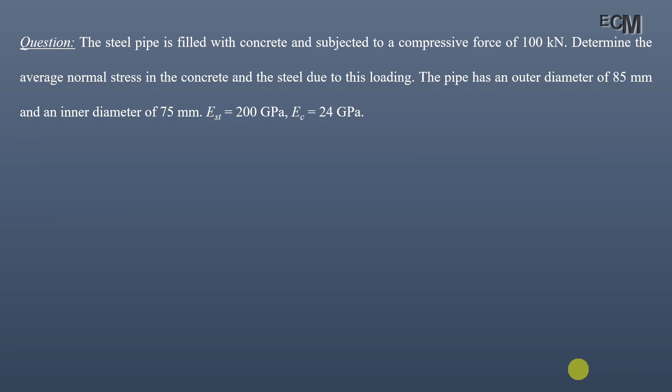The question states that a steel pipe is filled with concrete and is subjected to a compressive force of 100 kilonewton. We have to determine the average normal stress in the concrete and the steel due to this loading. The pipe has an outer diameter of 85 mm and an inner diameter of 75 mm. Modulus of elasticity of steel is 200 gigapascal and for concrete it's 24 gigapascal. The pipe, filled with concrete, has a length of 1000 mm, and a loading of 100 kilonewton is applied. We have to find the axial stress in the steel and concrete respectively.

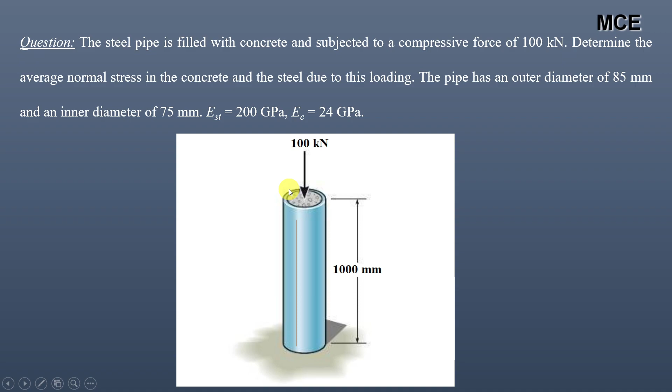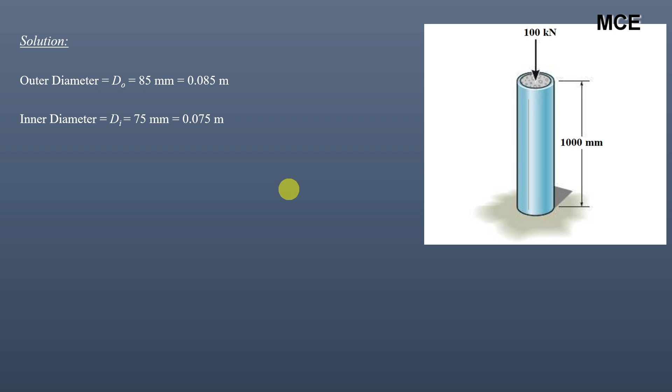Outer diameter for this pipe is 85 mm or 0.085 meter, and inner diameter is 75 mm or 0.075 meter. Cross sectional area of the steel will be pi into square of outer diameter minus square of inner diameter, divided by 4, which is pi into 0.085 squared minus 0.075 squared divided by 4, equal to 1.257 into 10 raised to the power minus 3 meter square.

Cross sectional area of concrete: since concrete fills the inner portion of the pipe, its diameter equals the inner diameter of the pipe. So cross sectional area of concrete is pi into 0.075 squared divided by 4, which is 4.42 into 10 raised to the power minus 3 meter square.

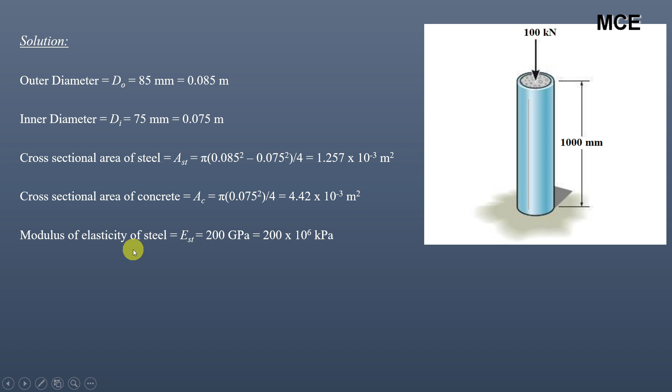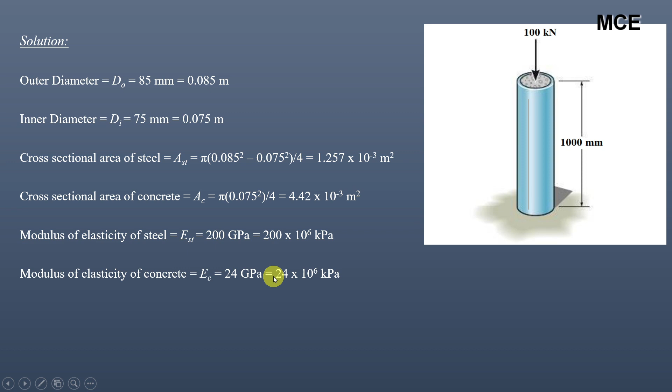Modulus of elasticity of steel is 200 gigapascal or 200 into 10 raised to the power 6 kilopascal. Modulus of elasticity of concrete is 24 gigapascal or 24 into 10 raised to the power 6 kilopascal.

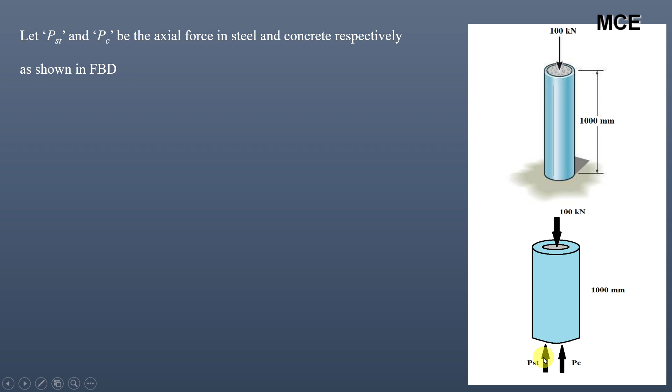After that, we draw the free body diagram for this pipe. Let us assume that PST and PC are the axial forces in steel and concrete respectively, as shown in the FBD, with both forces assumed in the upward direction. For equilibrium of forces, taking upward as positive and downward as negative, we can write PST plus PC minus 100 kilonewton equals 0, or PST plus PC equals 100 kilonewton. Let this be equation first.

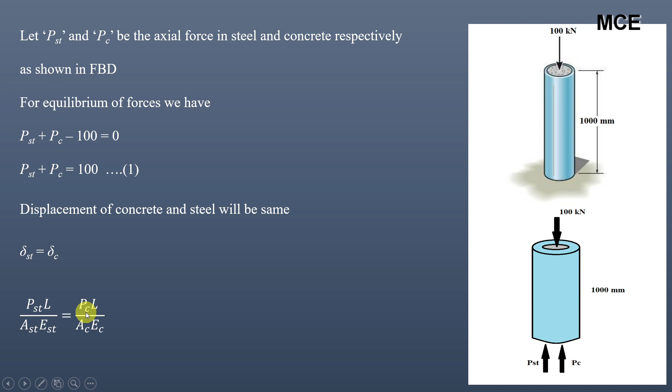From the compatibility condition, since this pipe is fixed at the bottom, the displacement of concrete and steel will be the same. So displacement of steel equals displacement of concrete. Displacement of steel is PST into L divided by AST into EST, and displacement of concrete is PC into L divided by AC into EC.

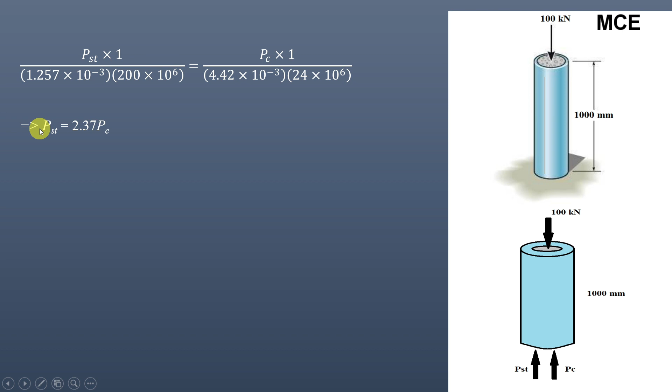Putting in values: since the length of this bar is 1000 mm or 1 meter, L is the same for steel and concrete. Cross sectional area of steel is 1.257 into 10 raised to the power minus 3, and Young's modulus of steel is 200 into 10 raised to the power 6 kilopascal. Cross sectional area of concrete is 4.42 into 10 raised to the power minus 3, and Young's modulus is 24 into 10 raised to the power 6 kilopascal. This gives the value of PST as 2.37 times PC.

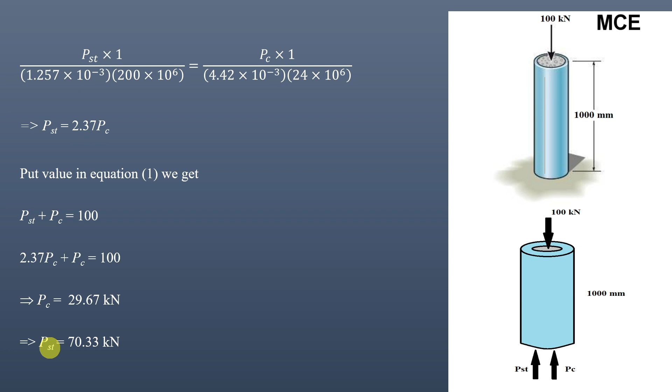Now putting this value in equation first, which was axial force in steel plus axial force in concrete equals 100 kilonewton. Writing axial force in steel as 2.37 times axial force in concrete, plus PC, equals 100, we get the axial force in concrete as 29.67 kilonewton. Putting this value back into equation first, we get PST equal to 70.33 kilonewton. So axial force in concrete is 29.67 kilonewton and axial force in steel is 70.33 kilonewton.

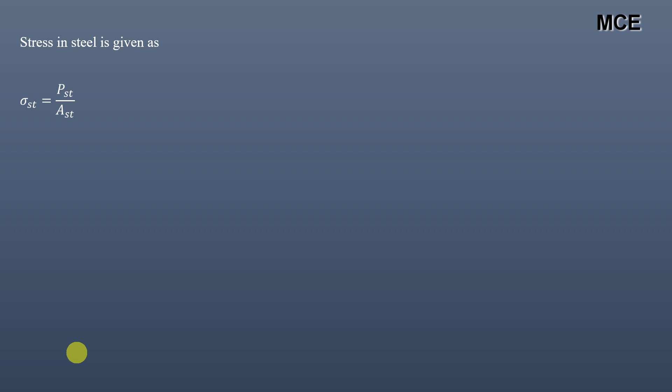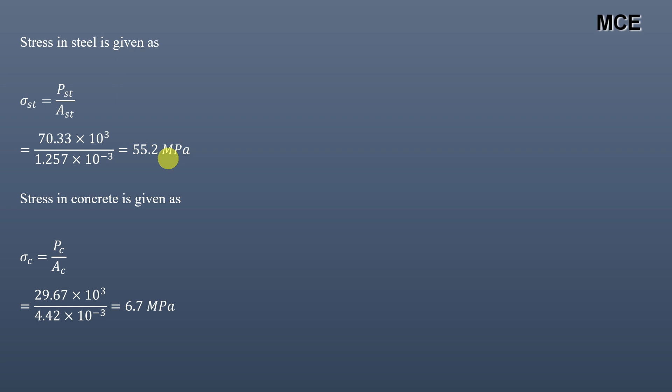After finding the axial force, we can easily calculate the stress in steel and concrete. Stress is axial force divided by cross sectional area. Stress in steel is PST divided by AST, so it's 70.33 into 10 raised to power 3 divided by 1.257 into 10 raised to power minus 3, equal to 55.2 megapascal. Similarly, stress in concrete is axial force in concrete divided by cross sectional area of concrete, which is 29.67 into 10 raised to power 3 divided by 4.42 into 10 raised to power minus 3, equal to 6.7 megapascal.

So this is how you can find the axial or normal stress for a composite material. You just have to apply the equation of compatibility.